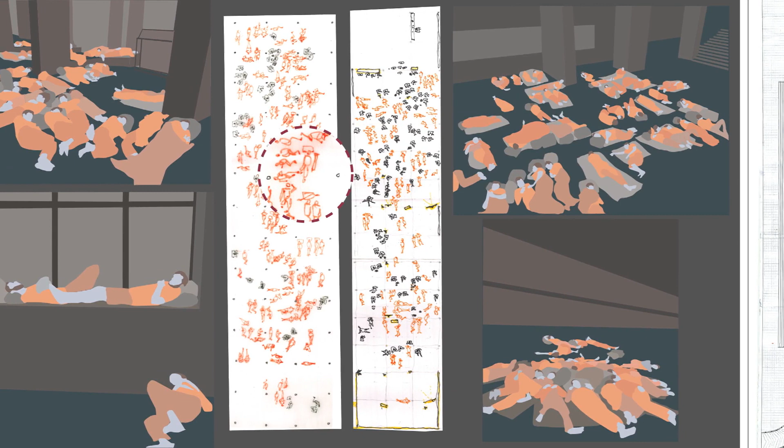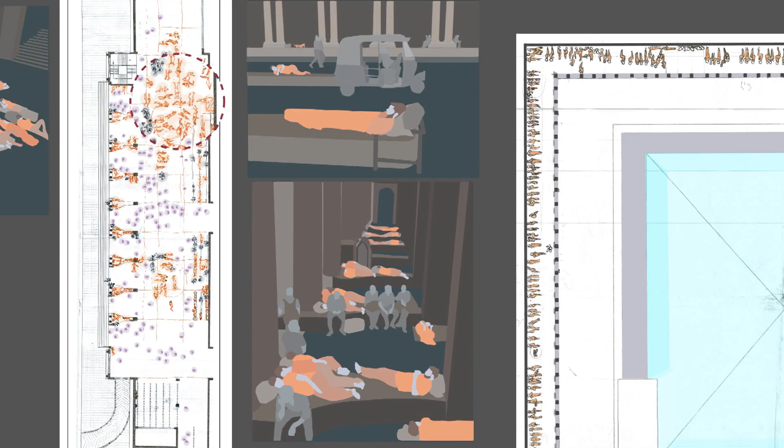I recorded the data of people sleeping for over a period of 2 months during night and studied it for the next 4 months, and came to a conclusion that there is a paradoxical image of public infrastructure between state and civilians. On another hand, government decided to revamp 600 railway stations across India.

But when I investigated the program, it was clear that the revamp is done ignoring all such kind of public phenomena. So I decided to put a program and resolve it, to see if there is an alternative available or not.

Next is why Ayodhya. After Supreme Court verdict on Ram Janmabhoomi, Ayodhya administration proposed various development projects, like the world's highest statue of Ram worth rupees 400 crore, a Shabri Garden, Ashok Vatika, Ram Setu, first flight to land in Ayodhya by 2021, 25 acres of plot for Ram Ramayan Museum, and redevelopment of railway station.

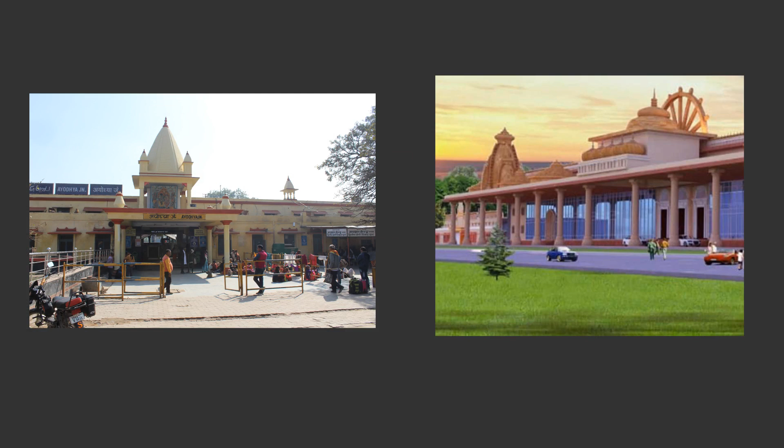But the railway station was supposed to be made a replica of Ram temple. Here arises the question: is the public facility building meant just to look like a replica of a temple, or more than that? So I decided to put a program and resolve it, to see if there is an alternative available.

The program consists of three public facility buildings: hotel, station, and hospital. Hotel, a house where traveler comes to rest. Station, a halt where motion comes to cease. Hospital, a home where sick waits to get well.

None are permanent places to stay or to live. All of them are like this life, only a temporary abode of soul. Life is hospital, hotel, and station. Come, arrive, and away you go.

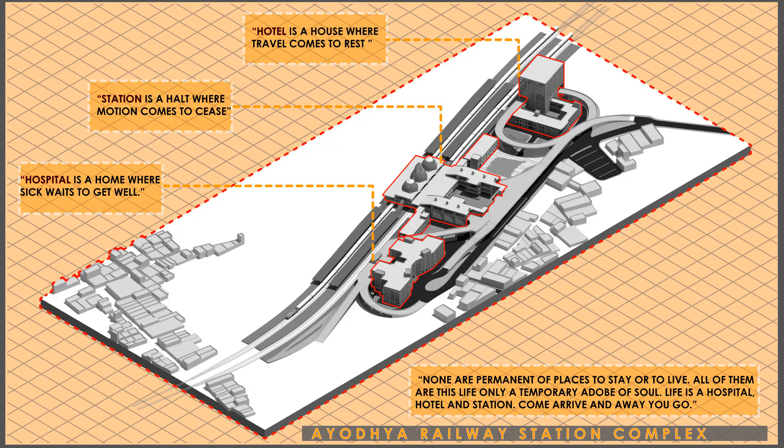Station lies on the edge of the town in straight alignment to Ram Janmabhoomi. It connects with Ayodhya Faizabad Road at a junction, 200 meters, leading to Naya Ghat towards east.

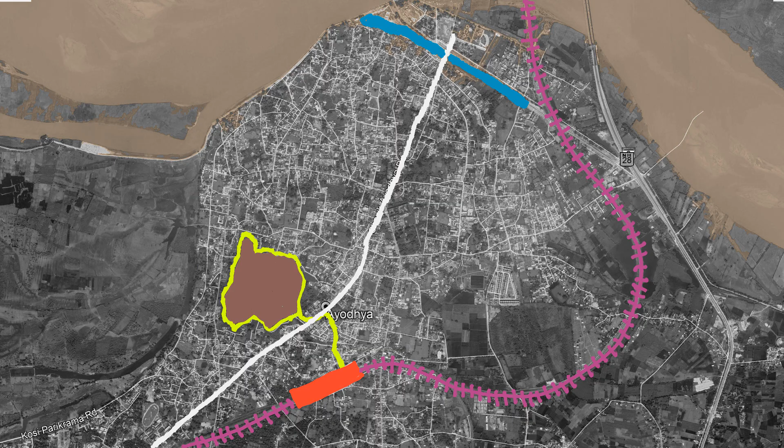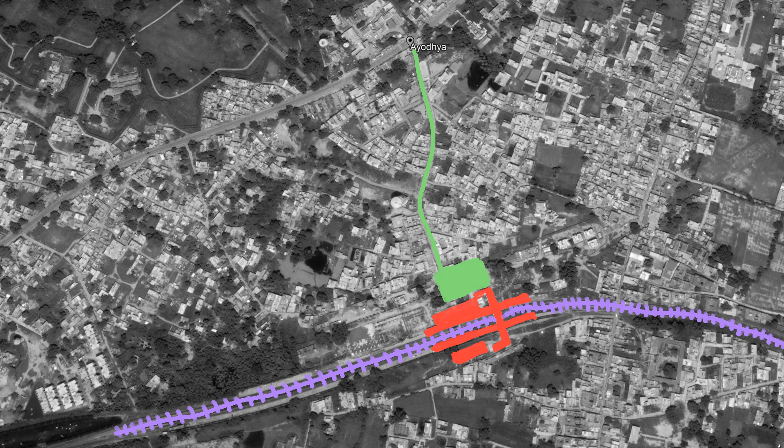At present, access to the station is through an 8-meter wide two-way road. In the present proposal by administration, houses on the edge of the road are to be relocated to make it wider. I tried to propose an alternate method without dislocating the locals, by shifting the station site with the rail fixed, allowing access through a one-way network with separate entry and exit routes.

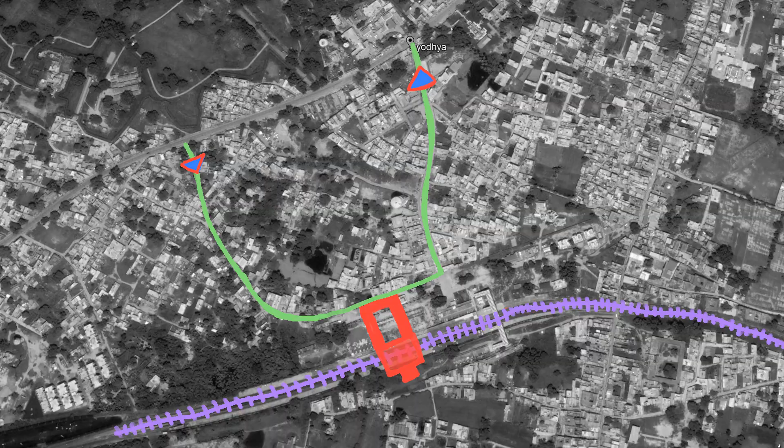At present, there are only two platforms at the site. With the upcoming development in the town, the number of tourists is advised to go very high, so does the capacity of the station need to be. According to railway standards, the number of platforms have been increased from 2 to 4, with passenger density norms.

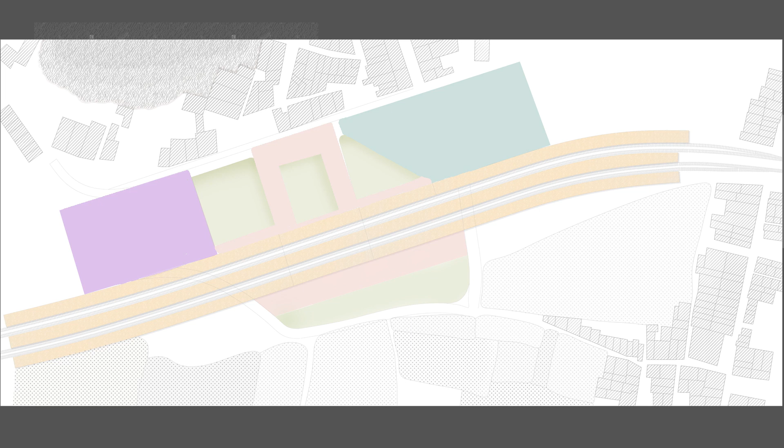Station being in the center, the other two commodities have been placed at the two edges. Hotel and hospital public entry has been uplifted and placed opposite to the access road, in order to reduce the load on the road front and free the ground for public.

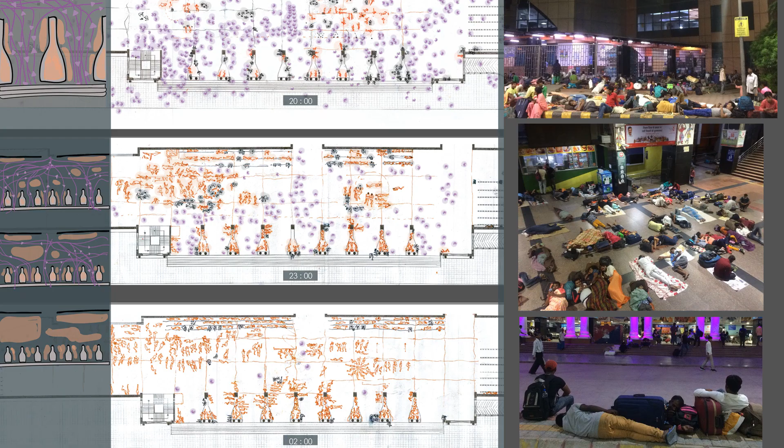Station arrival and departure have been separated into two levels to better manage the crowd. There are both static and kinetic crowd in a built space. Railway station has both in a fair fraction. Time is the very factor to which one type of crowd dominates the other.

There are clashes also between momentary crowd and static crowd, which are mostly resting on the floors. In momentary also, the category got further broken into two: arrival and departure. In order to give each crowd its space, the station is divided into three levels.

The lowermost consists of ticket booking and arrival of passengers. The middle is waiting deck connected with resting corridor and platforms. The topmost is for departure, that is access through the uplifted corridor.

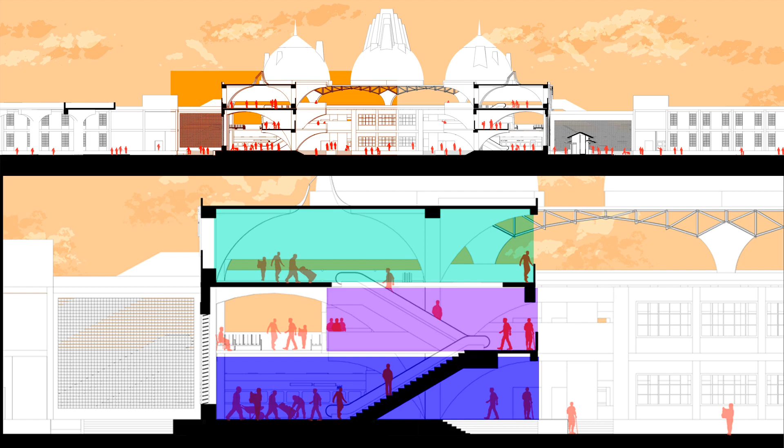There is a pair of arrival, departure, and resting corridor with courtyard in middle, whereas open spaces adjacent to corridor act as a buffer as well as a vendors and hawkers ground. Station being in the center gives planning a symmetrical balance.

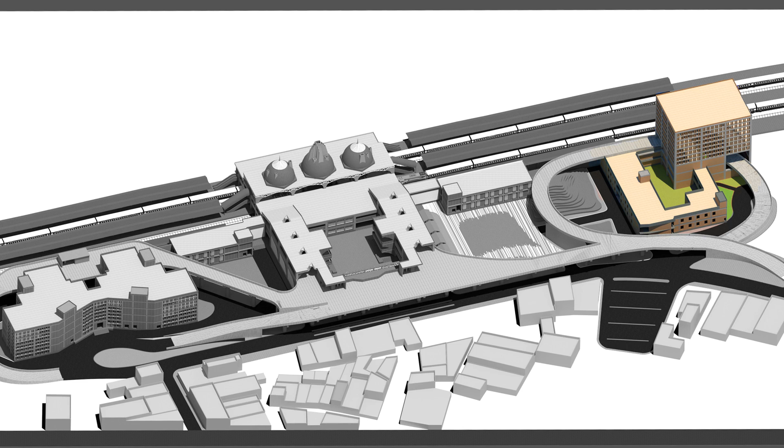Next in the line is Dharamshala and Hotel, put under scheme of Railway Yatri Niwas. Dharamshala lies on the ground, connected through front passage, consists of two categories of accommodation on two sides with courtyard in between, and admin, eateries and community kitchen on the front side.

On the other hand, hotel base is used for station service like postal storage and service machineries. It has uplifted entry opposite to the main axis, facing the rails of the train.

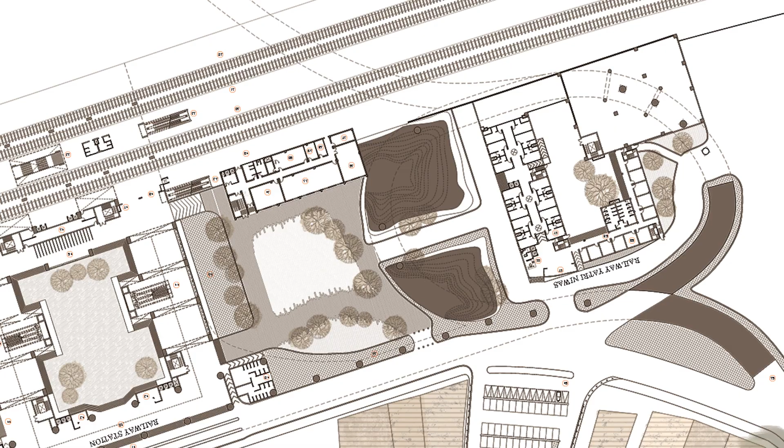Next in the line is hospital. But why hospital? I'll say why not a hospital? In a town with future world's highest statue proposed, there is not a single hospital with all required departments and equipment. There is one small public hospital at 200 meters from railway station, at junction to the Ayodhya Faizabad road, but the condition is very poor.

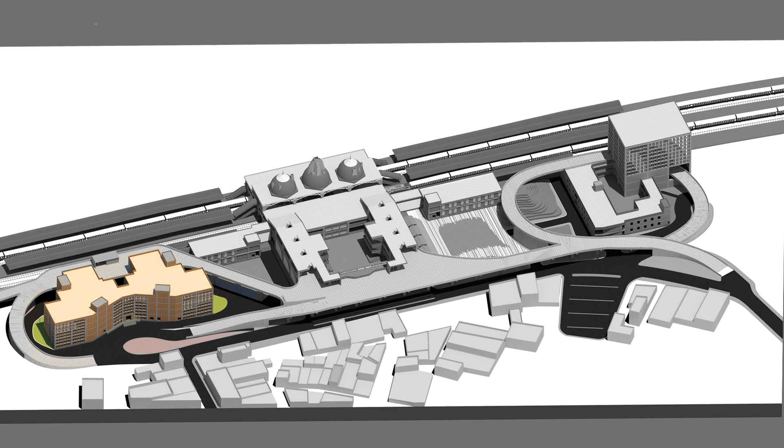The proposal is to make it a local dispensary connected to hospital admin at railway station. Why at railway station? Because it's already being developed as a potential node to hold the load of public facilities. A general public restricted ramp from the uplifted corridor gives direct access to the emergency ward of the hospital.

Other half is diagnostic department with all kinds of facilities ranging from radiology, mammography to MRI and CT scan. OPD lies on the second floor with major entrance through uplifted corridor. Person coming from ground can access the OPD by crossing the building and taking lift or stairs on the station wall.

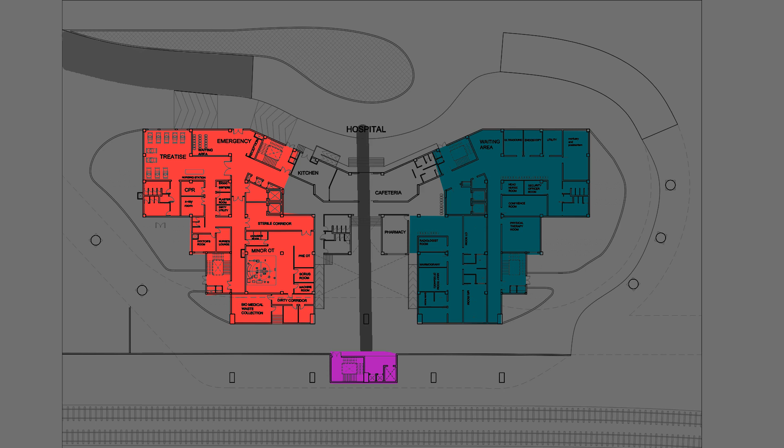Operation theatre lies on the first floor, connected with lift directly to minor OT on ground floor. It is equipped with a 6-bed intensive care unit and 3 beds of high dependency unit. The other side of the building consists of maternity ward and VIP IPD rooms. All the OT service rooms are placed in the middle, with lab on the other side.

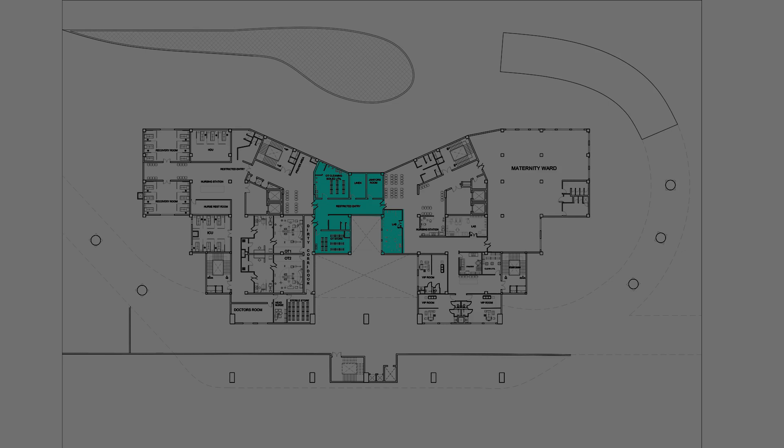Second floor is connected with uplifted corridor with entry to OPD. The other side consists of IPD ward with 44 beds and pantry in center. Uppermost floor has 96 beds for IPD.

Hospital, hotel, station can be a better alternative than spending 100 crore on making railway station just a replica of a temple. Thank you.